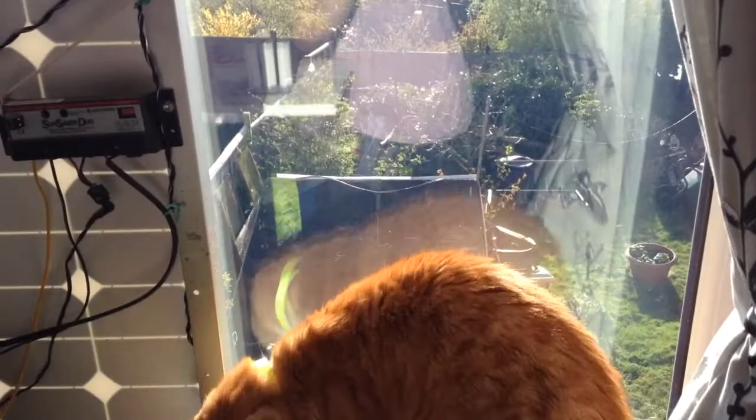Today is the first really sunny day of 2017. It is the 2nd of April and outside it has been very sunny all day long. We have done some work in the garden and that's outside. It's very sunny. Outside there are 3 100-watt solar panels on the roof of my shed that you can see the white border for. That's the white line on the top of the shed.

They're wired in series as I have a MPPT solar charge controller. This is the EPever Tracer 3215BN MPPT charge controller. This is the 30 amp version and you can plug in a remote meter, the MT50, which you've seen me using before, but at the moment you can see that the display is blank. That's because it's not plugged in.

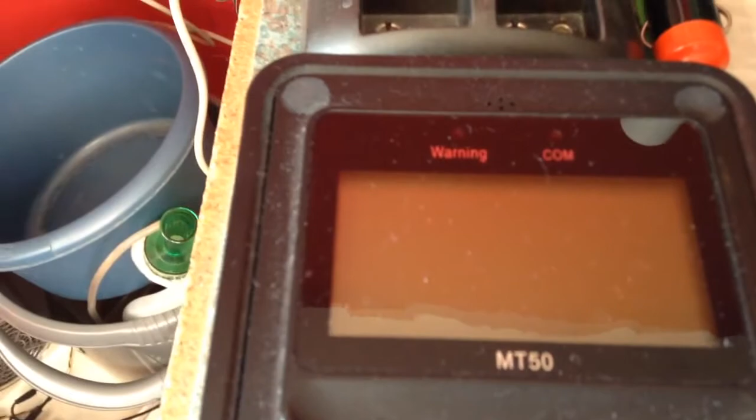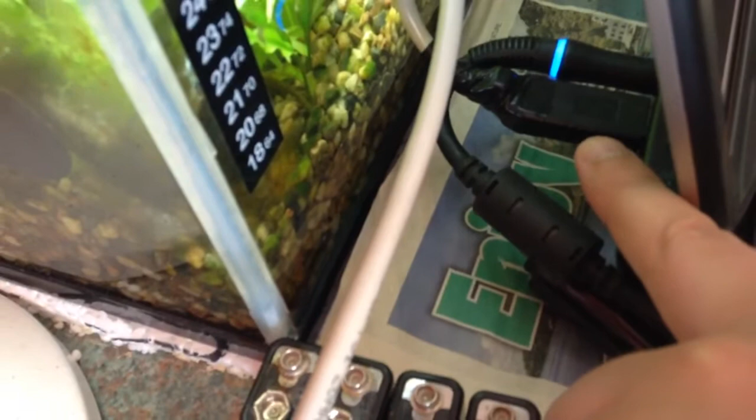I have the controller plugged into my laptop. So how you do this is you buy a USB to RS485 converter, and then I just use some cheap network cable, and the controller has an RJ45 socket on the front, so that is that. Yep, the RS485. So you can connect it to your laptop and you can monitor your solar charge controller.

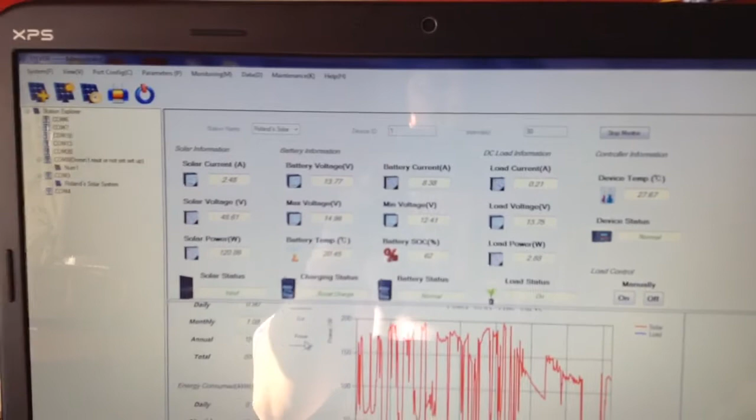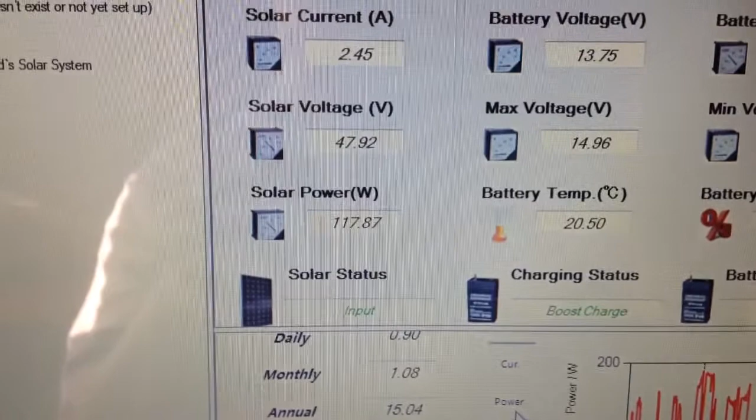So this is the EPever solar station monitor software, and I have it linked to my Tracer charge controller. So you can see that the current coming in from the solar panels is 2.45 amps and the voltage is 47.92. Apologise for the loud noise in the background. That's my power inverter, which is actually powering my laptop, and we have a power of 117.87 watts coming in at the moment. Then we go on to the battery voltage.

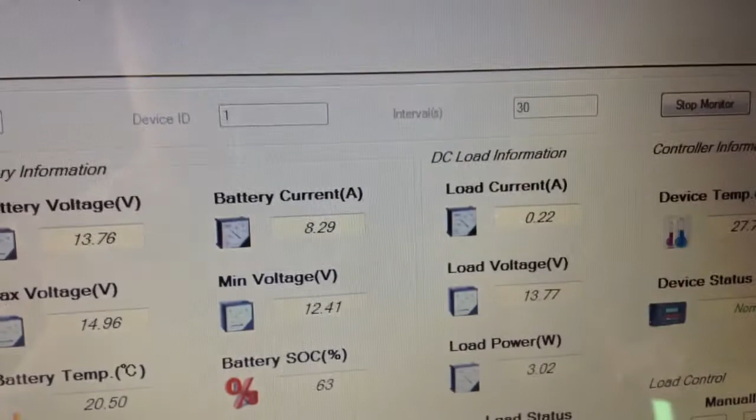The battery bank is at 13.76 and the charging current is 8.29 amps. So as it's demonstrating the MPPT, we have 2.44 amps at 47.92 volts going in, and we have 13.76 volts at 8.2 amps coming out. The minimum voltage of the battery bank today was 12.41 volts and the maximum was 14.96.

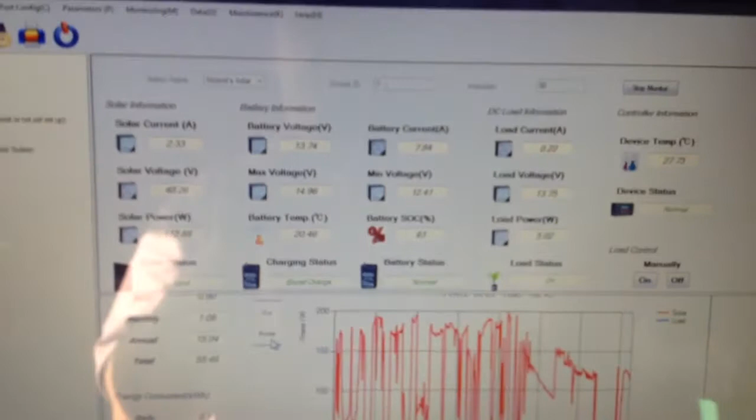That voltage is high because I have AGM batteries, and the label on the batteries states a charging voltage of up to 15 volts. If you have other types of sealed lead acid batteries, then you need a lower voltage, but that will be given on the specification sticker that's on your batteries. You should always use the voltage that is stated on your batteries. It is not good to overcharge your batteries, as it will shorten the useful life of your batteries, and batteries are expensive and you want to take care of them.

So from the load output of the charge controller we're drawing 210 milliamps and the voltage is the same as the battery, 13.75, and the power of the load is 2.88 watts. I will state now that that is what is being drawn from the load output of the charge controller.

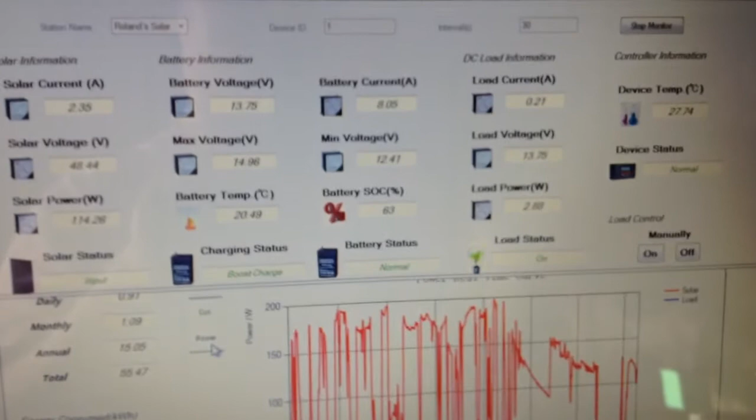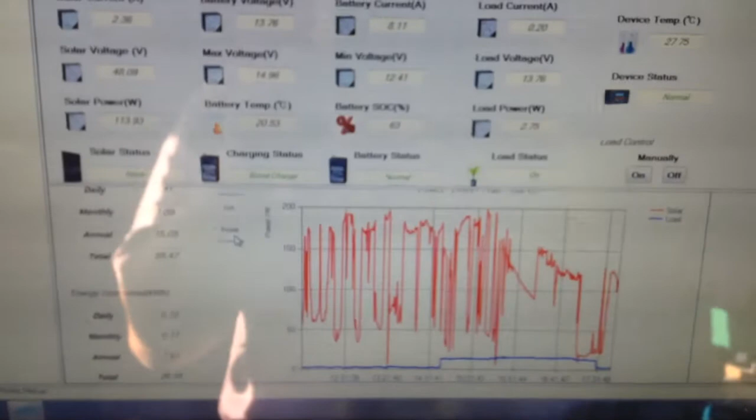I am using a 300 watt pure sine wave power inverter, 12 volt model, and that's wired directly to the battery bank, because at maximum power it draws 30 amps and the charge controller can only supply 20 amps from the load output. I did say it was a 30 amp controller; it can put 30 amps out to the batteries, but only 20 amps out to the load. So any load that is being run from your inverter will not be shown here.

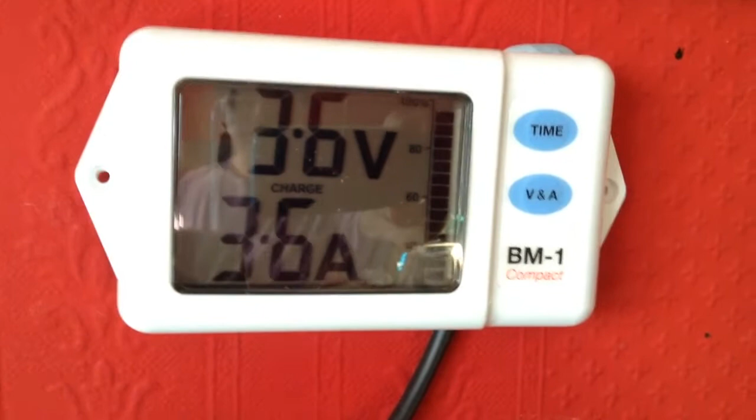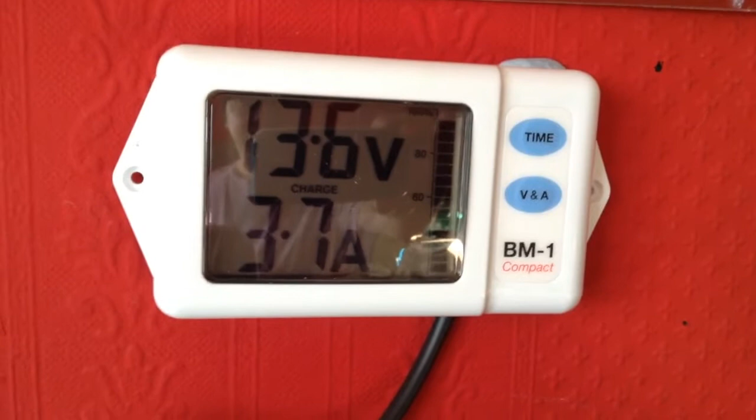You can see in the background here that I have a NASA BM1 battery monitor, and this shows the total net charge or discharge on my battery bank, and you'll see that it says I'm charging at 3.6 amps even though I am running the power inverter. So this is the difference between the charging current and the current being drawn from the batteries. So this is the net difference. So in this case I am charging my batteries.

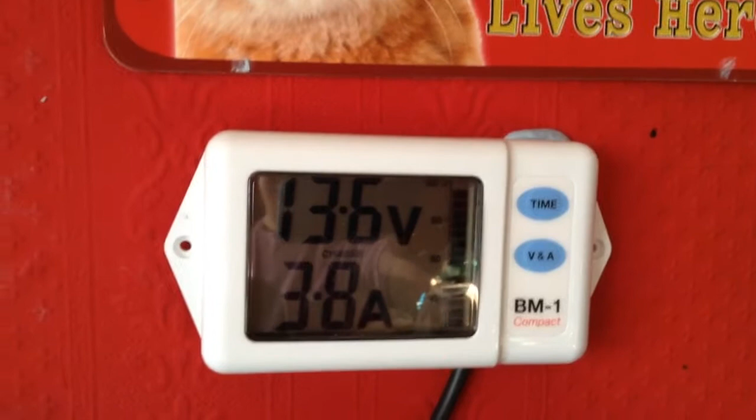Now this says my battery bank is at 13.6 and the Tracer says 13.78; I would trust the NASA BM1 more because it is a more expensive device. So that is that. It does say that at 13.78 volts my batteries are 64% charged. That is not true. Anything over 12.6 volts is considered 100% charged.

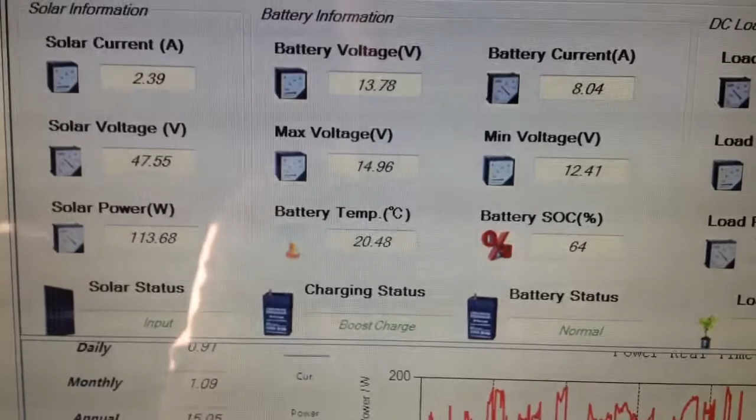So disregard this. The controller has a battery temperature sensor, and the temperature of the batteries is 20.48 degrees Celsius, and the controller itself is at 27.78 degrees Celsius. And it states that there's solar coming in. The controller is in boost charge mode, there is no fault with the battery, and the DC load is on.

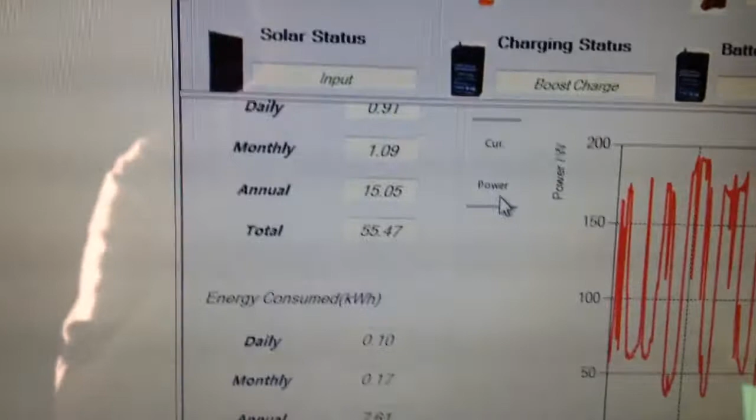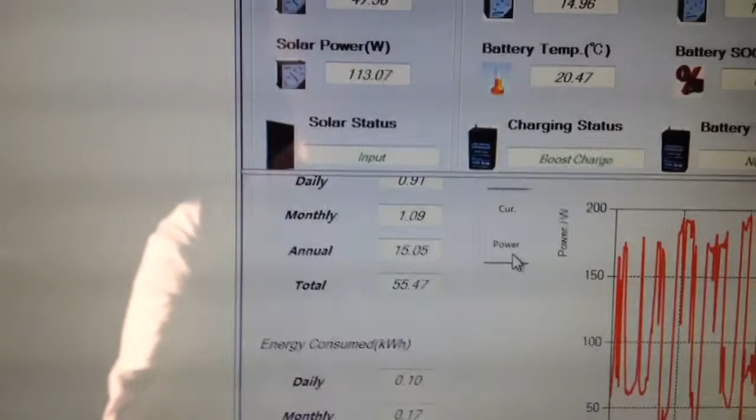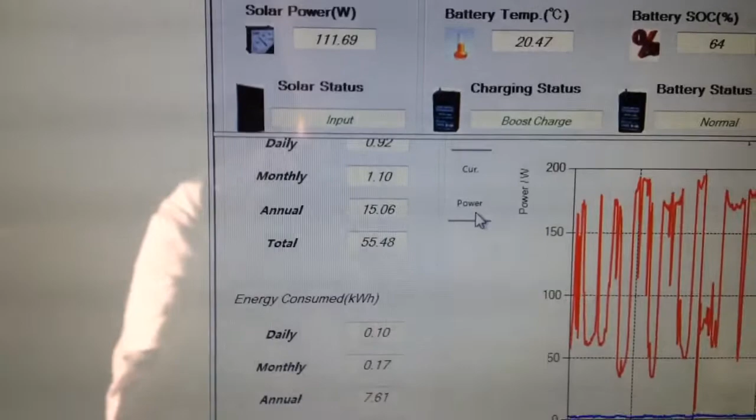Okay, coming down we have some energy production figures. This is for energy production, that is, from the solar. So today we have produced 0.91 kilowatt hours, that's the highest ever. This month I produced 1.1 kilowatt hours. This year I have produced 15 kilowatt hours and an all-time total of 55.48.

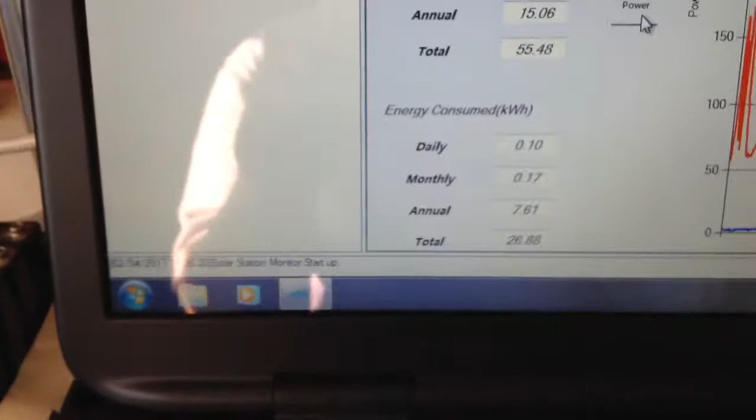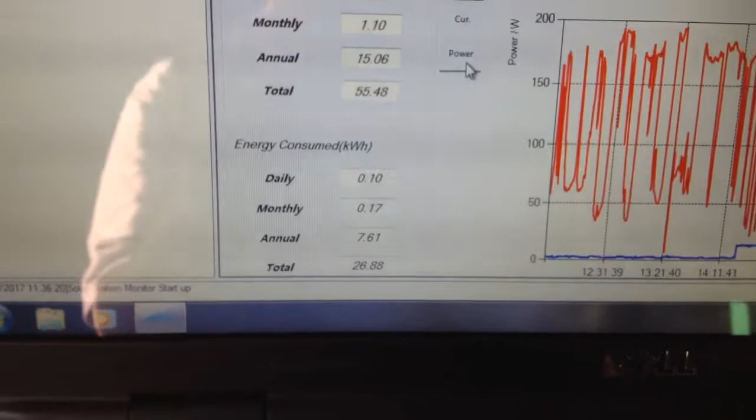The energy consumed here is only the DC load. So anytime I run the power inverter, this messes up these figures because the controller doesn't know about any load that is wired directly to the batteries. So that's how that works.

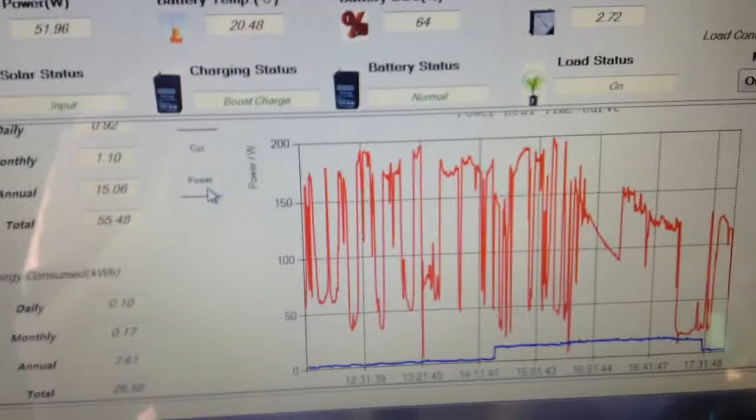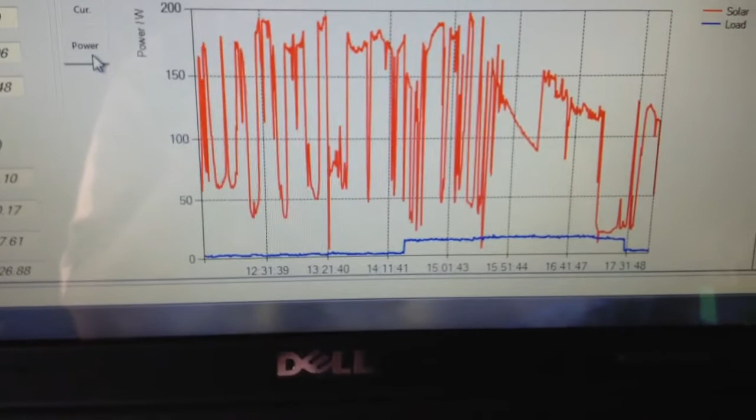Okay, coming to the real-time curve as shown on the screen. This is the power curve. The red line represents the solar panels and the blue line represents the DC load, i.e. not the inverter. So what you can see here is that we have 50 watts, 100, 150, 200 watts. That is the power coming in.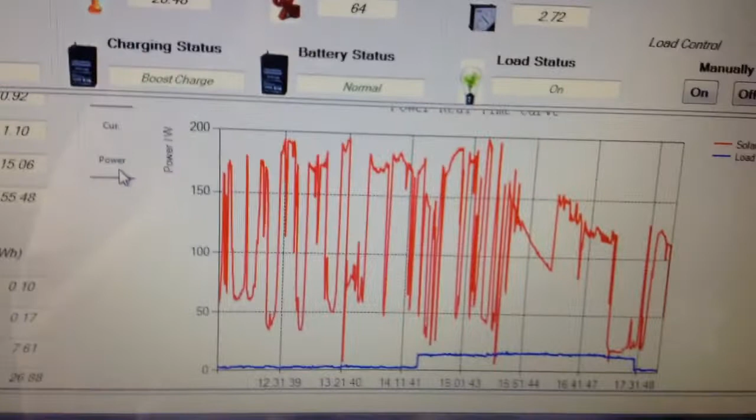I apologise for my sniffling, I do have a cold.

So what you can see here is that for the majority of the day the input power has varied between approximately 50 watts and nearly 200 watts. So that is a good day.

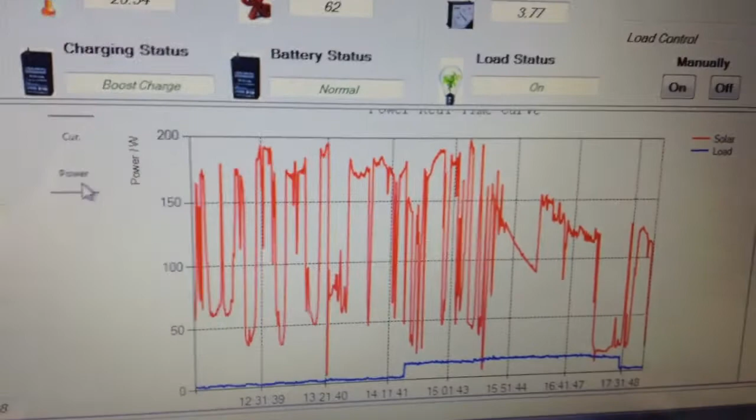Now I will say that I have run the inverter pretty much all day, running my laptop and the power drill charger since I used it today, and I charged the electric bike battery. Since I have good weather and lots of power coming in, I thought I would charge up my equipment. So you take advantage of the weather.

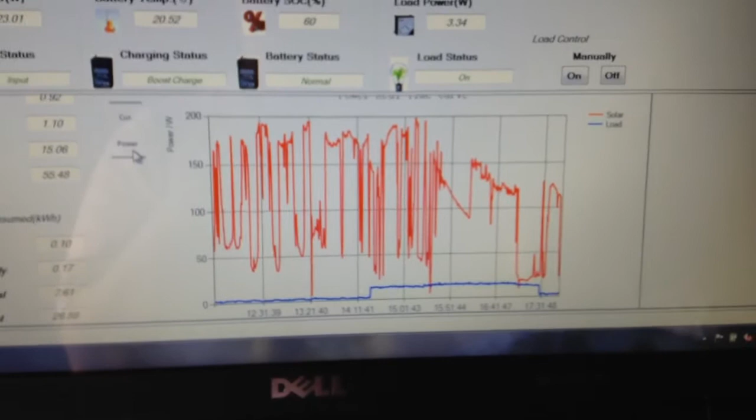I normally do my charging of devices mainly on Sunday. That's the bigger things I charge on a Sunday during the daylight hours when there's sun. So that is the real-time power.

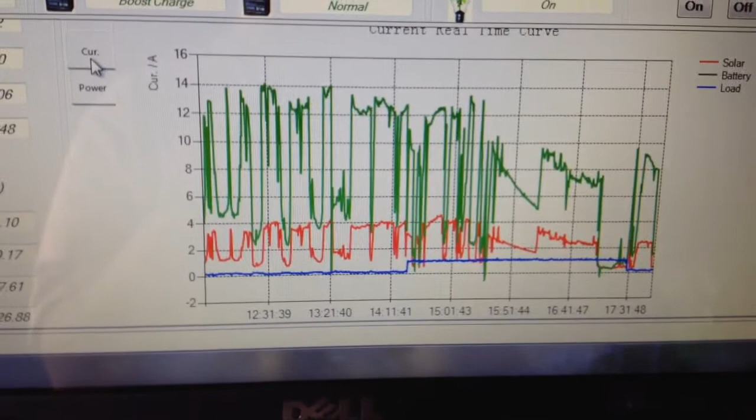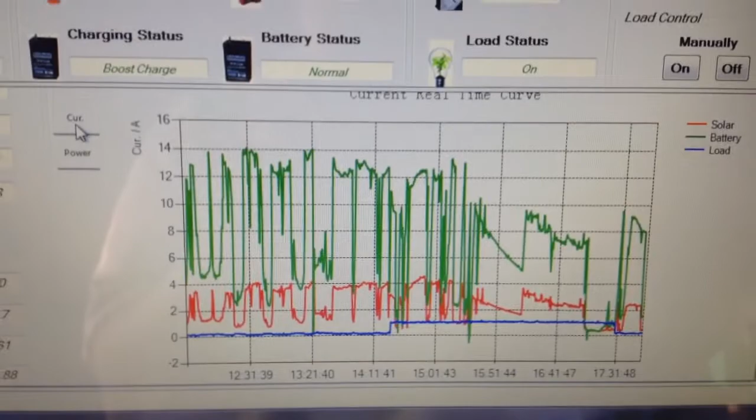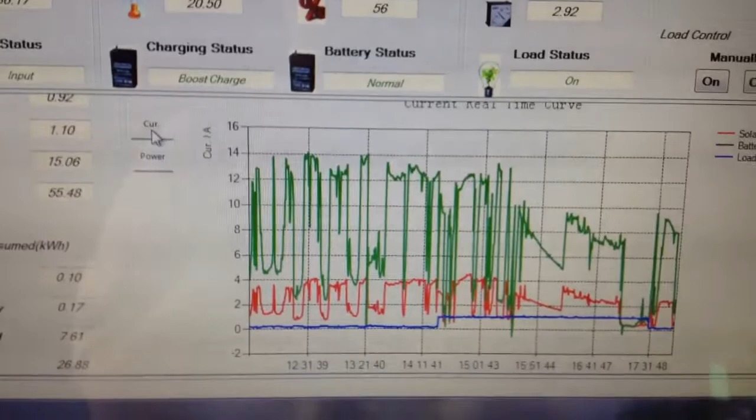If I go to the current one, you'll see that this is the current curve. The red line is the current coming from the solar panels, and the green line is the current going into the batteries. Now, as you can see, this is an MPPT controller, so we have low current at high voltage coming in, and we have low voltage and high current going out to the batteries. That is the DC to DC conversion performed by the charge controller.

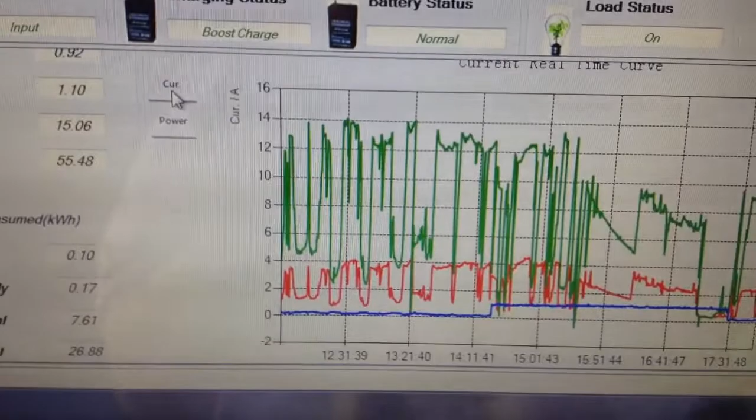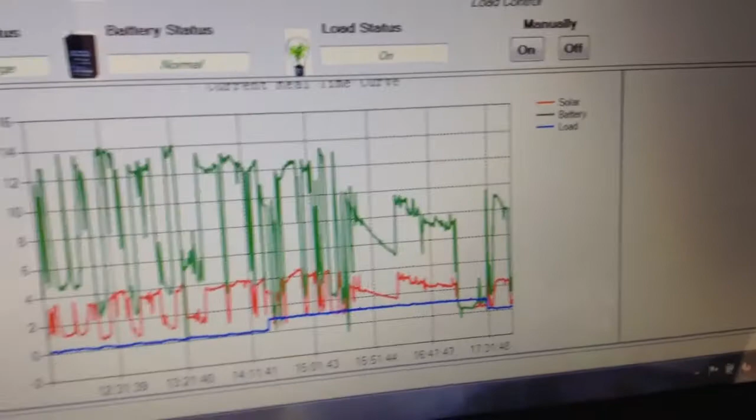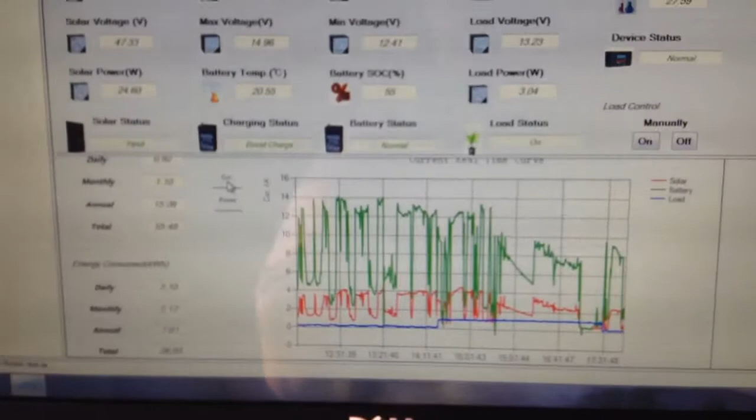And you can see today that I've been doing well. A lot of the time the current's been over 12 amps. There were a few blips when the clouds came over, but on the whole this has been a good solar day. So I have 300 watts of solar panels. They are three so-called 12 volt panels wired in series, so I can see a voltage in excess of 60 volts on a very good day.

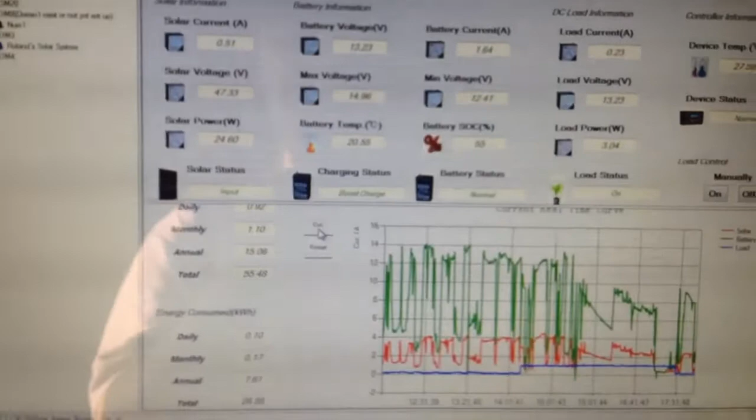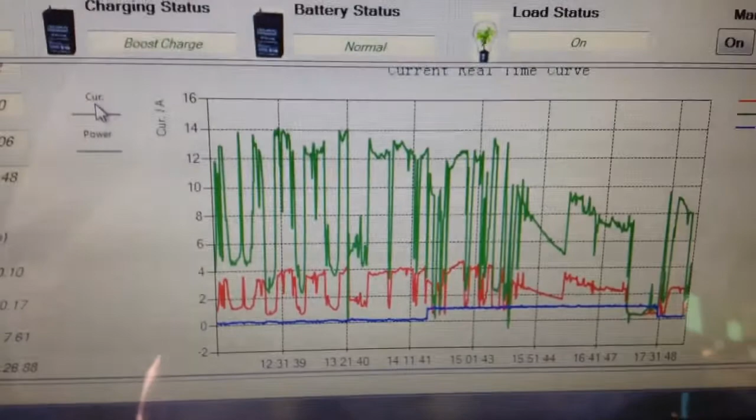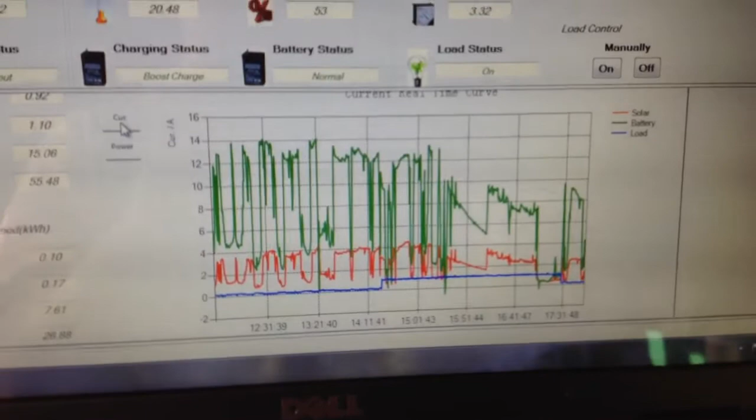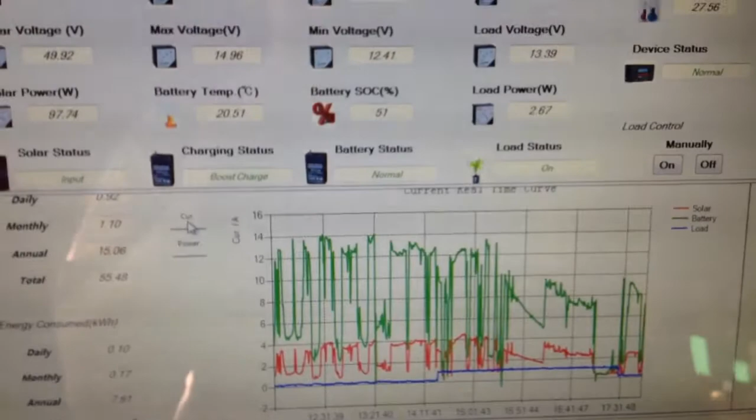So this is the EPEver software. Now the only thing about this is that, from what I can work out, I can only produce this curve with the laptop connected to the solar charge controller, and while I want to monitor it, I have to leave the laptop connected to the charge controller. I've had the laptop on all day in order to do this. I don't see any other way that I can download the data from the charge controller. I've not seen any way of doing that.

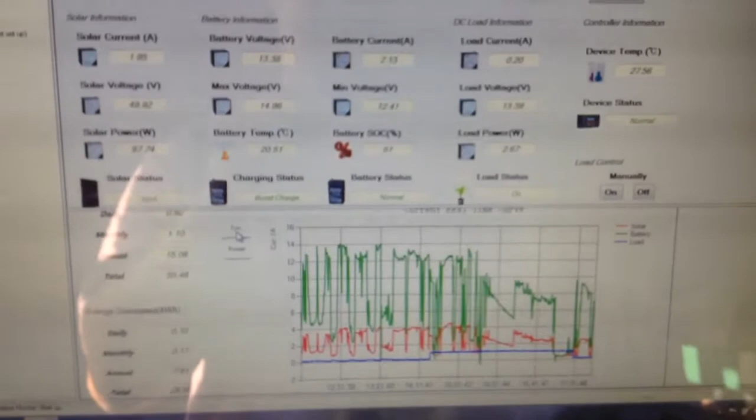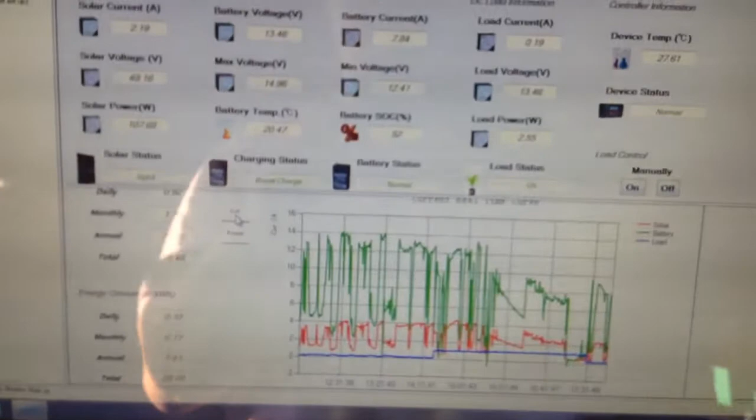I will just say that this laptop is a Dell XPS 17. It's a desktop replacement laptop, so it's fairly powerful, and running it on the inverter, it uses approximately 100 watts when it's working, so that's a good load for the inverter.

And basically what normally happens is the batteries top off and then the controller throttles down the charge to stop the batteries overcharging. So if I want to see what sort of potential my solar panels have, I've got to place a load on the charge controller to stop it reaching the float mode.

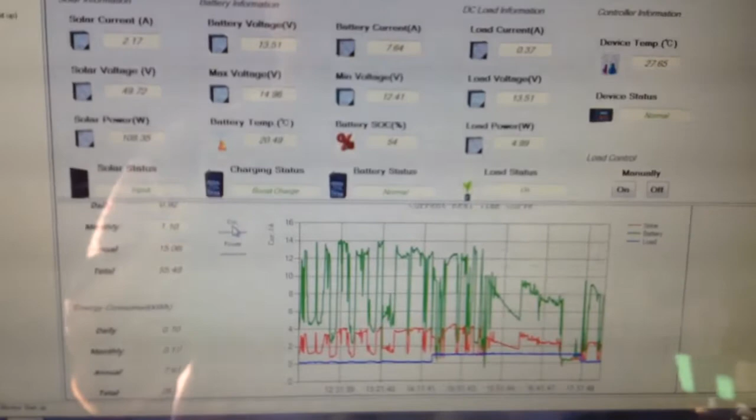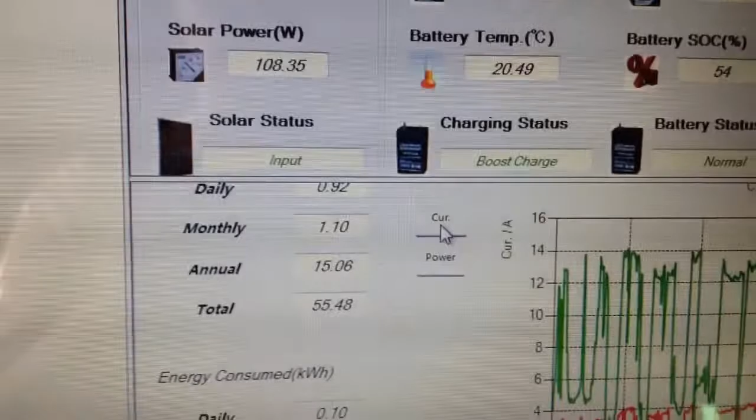So that's why I've run the laptop all day, and my target today is to reach 1 kilowatt hour, which I have never done before in my time with a solar power system. So I'm on 0.92 at the moment, and I think that I should be able to reach 1 kilowatt hour today.